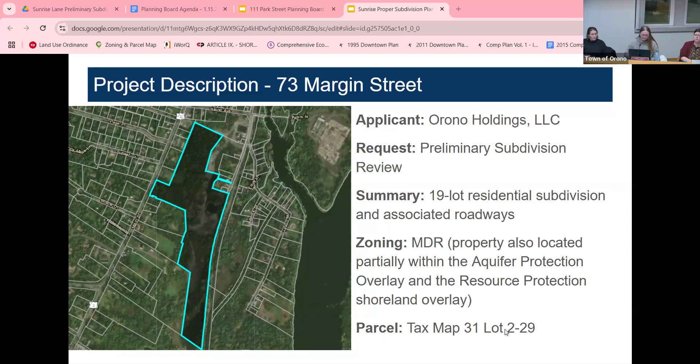So this is a zoomed in picture of the overall development area. You can see that it's really that portion of the site behind the Main Street properties. This site was formerly a gravel pit and construction area. The street you're seeing coming down from Main Street was formerly an access drive to that site. If you're driving by, you can almost see the outline of that on the site, entering there from Main Street. They're proposing to

sort of build out that roadway to our public street standards. And then they're also proposing a connection over to the private driveway, which they have an access easement over. It's the driveway you would utilize to access Orono Brewing, that access drive that they're proposing to connect to. And that was based on the planning board's comment at their conceptual plan review that you would like to see some interconnection of this proposed subdivision. You'll remember that previous iterations of the plan had shown at one point a cul-de-sac or a hammerhead there at the end.

So there are a number of issues that the board asked me to provide some clarity on or a summary of. One of those is related to buffering and screening. The board will remember that at our conceptual plan review, you had asked for a 20-foot tree clearing buffer, an undisturbed buffer rather, on lots 1 through 10. Those are the lots that directly abut the Main Street properties. That has been added to the overall site plan. You can almost see it here, there's an arrow pointing out that limits of tree clearing.

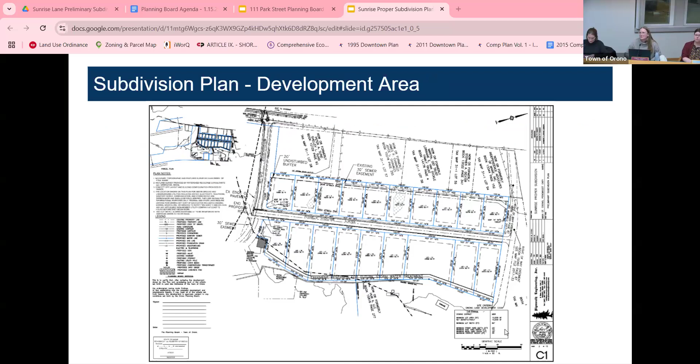In terms of trees and natural resources, no portion of the site is within a unique natural habitat determined by the Maine Natural Areas Program, or an area sensitive to archaeological or historic resources per the Maine Historic Preservation Commission. There's also no portion within significant wildlife habitat areas, such as habitat for state or federally listed endangered or threatened species, higher or moderate value waterfowl and wading bird habitats, nesting or feeding areas, critical spawning or nursery areas, or higher or moderate value deer wintering areas. That's all from available mapping from Beginning with Habitat, shared with the town.

The site is also not crossed by any known trails, based on available town GIS mapping.

The applicants have submitted, along with their application, a wetland delineation completed by Watershed Resource Consultants for the entirety of the site, including the larger portion. They found one non-significant potential vernal pool, along with 3 wetlands and 4 streams within the overall site. The wetlands area related to this development is shown on the overall subdivision plan.

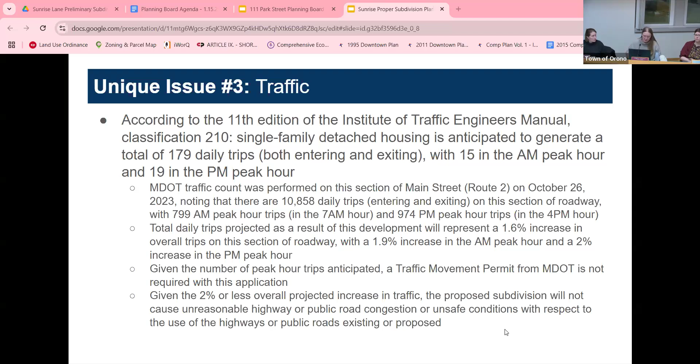With regards to roads and access, there are two minor streets proposed - using that term because that's how our ordinance describes it - called Brookside Drive and Noble House Lane. The minor streets have a variety of standards they need to meet, outlined in table 7.4 of our subdivision ordinance. This section demonstrates that those standards have been met.

The streets are arranged so that Brookside Drive ends at about a 90-degree angle with Noble House. The intention is that any future street development, not contemplated with this application but for which additional land is available, would be extended from the end of Brookside Drive, in accordance with ordinance requirements. Minor streets need to meet those requirements of table 7.4.

In this case, the proposed right-of-way is 50 feet, which is the minimum requirement. The proposed travel way is 24 feet. There's a proposed shoulder width greater than 4.5 feet, which is the minimum by the ordinance.

And then there's a 5-foot sidewalk provided along one side of both of the proposed streets, in accordance with ordinance requirements. As I mentioned at the outset, the applicant does have an access easement over the adjacent private road or access drive, which they propose to connect to Noble House Lane in order to ensure multiple access routes into and out of the proposed development.

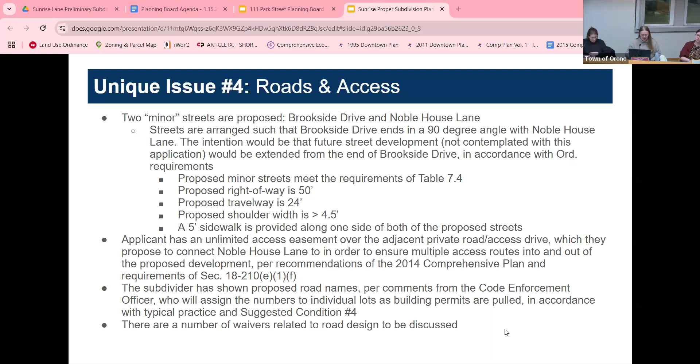There are also a number of waivers related to road design that we need to discuss, and I'll talk about that in just a minute.

So with regard to drainage and stormwater, I know the applicant's going to want to talk a little bit more about this, but the area proposed for development was a former gravel extraction site that has been allowed to revegetate. There is a paved access road that was used to access the pit that's being reconstructed as Brookside Drive. So currently stormwater flows east through on-site streams down towards the Penobscot River.

The proposed development will include 1.13 acres of impervious surface, and I think the applicant will want to clarify that there is some existing impervious surface on the site as well, which is included in that number. And there is 0.75 acres of landscaping within the proposed right-of-way.

The preliminary estimations for each lot show that upon full build-out, the subdivision will end up resulting in a total of 2.43 acres of impervious surface, driveways, homes, and garages, and 6.24 acres of total developed area, so lawns and other maintained vegetation. So post-development, the existing Main Street house lots, as well as the portion of the proposed development area, including Noble House Lane, will sort of drain towards the proposed wet pond.

That's located near the end of Brookside Drive. If you're looking at the overall subdivision plan, you'll see that there. The wet pond has been sized to meet current Maine DEP standards, including Chapter 500 and SLODA requirements for the road and the lots within the proposed subdivision. And the wet pond has been placed to utilize that natural grading pattern of the site.

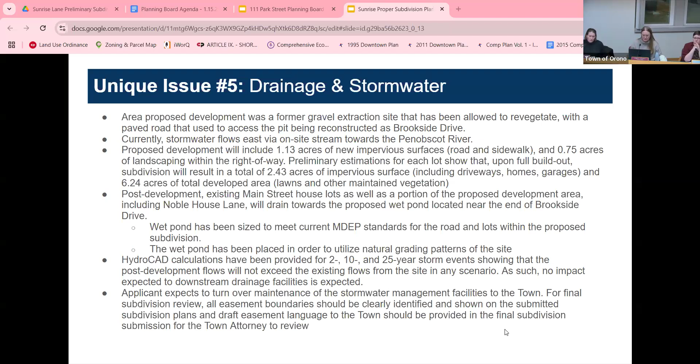And the applicant does expect to turn over maintenance of the stormwater management facilities to the town. So I do just want to note that for final subdivision review, we're going to need any easement boundaries that would be expected for the town to be maintaining to be shown on the final subdivision plans, and will need draft easement language sent to the town so that the town attorney can review that.

In terms of utilities, the proposal intends to utilize municipal hauling of trash and recycling. I reached out to Public Works. There's no known capacity constraints with our contractor, so the proposed subdivision will not cause an unreasonable burden on the municipality's ability to dispose of solid waste, which is the ordinance standard here.

The proposal intends to connect to the public water system through an 8-inch water main through the existing 16-inch main available within Main Street. And a preliminary capacity to serve email has been provided by the Orono-Veazie Water District back in February, and that's included in the meeting packet.

And then I do want to note that they are proposing to connect into public sewer as well. So the town's WPCF has the capacity to serve the proposed development. They have noted some concern with the condition of the clay line within Margin Street.

So we've come to an agreement with the applicants that they will be responsible for paying an impact fee, which will be in the amount of the replacement of one of the manholes specifically serving this site. That should be sufficient to prorate the applicant's portion of the impact to the sewer line, per conversations with WPCF. The town will either utilize that fee or have the applicant pay for and upgrade it at their own expense. We haven't worked out those details yet, but we'll be taking an amount sufficient to prorate the cost of their impact.

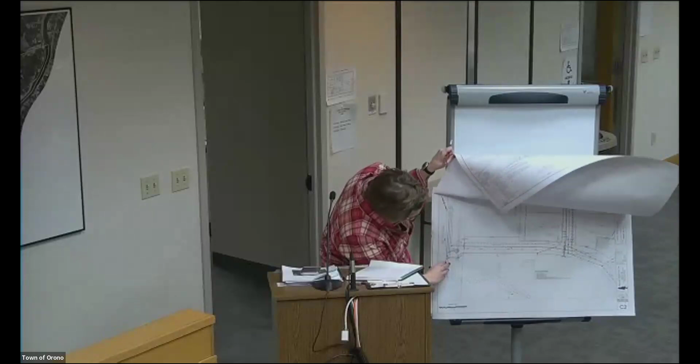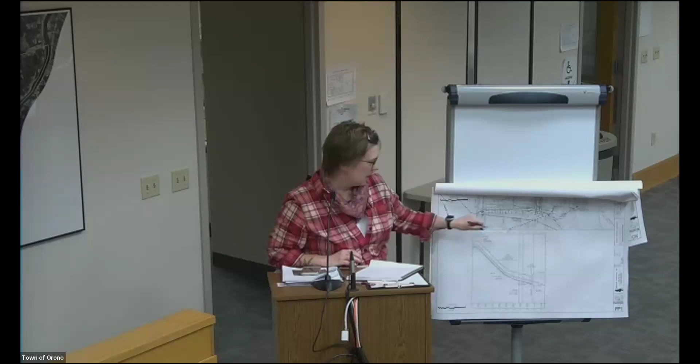PP1 is the plan profile of Brookside. So you can see here, even with the sidewalk put on this side, you've only got grading out maybe another 5 or 6 feet over here. But if you put the sidewalk on this side, it's going to drag everything down, and you're going to have to put more ditching on the lower side.

I didn't do any of the grading on this - that was something Scott had done. I know they bounced the idea back and forth, but that seemed to be the better of the two choices. So with the sidewalk, it's a tight site.

You're looking at the stream protection zone, which you've got identified on the plan. I'm just looking at the sidewalk - anything you can do, and we talked about this the last time you were here - protecting Johnny Mac Brook to the extent possible. But I just want to make sure that the toe of slope isn't pushing against that stream protection zone from the sidewalk.

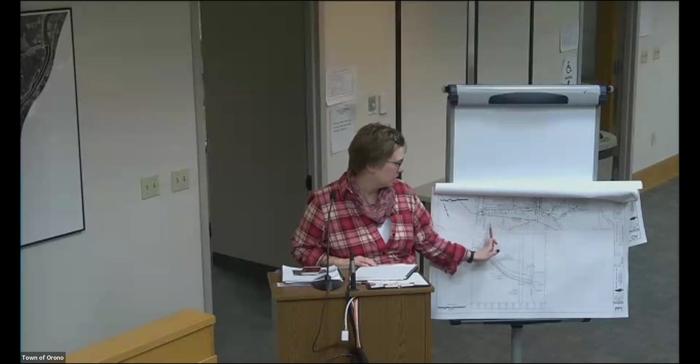I haven't seen the grading along that section of road, but it's pretty tight up toward Route 2 - right here, I think is the only place it gets real tight, just this portion, and it doesn't cross the stream protection zone. After that the stream gets further away, so the stream protection zone gets further away too. It gets close, but it doesn't cross into it.

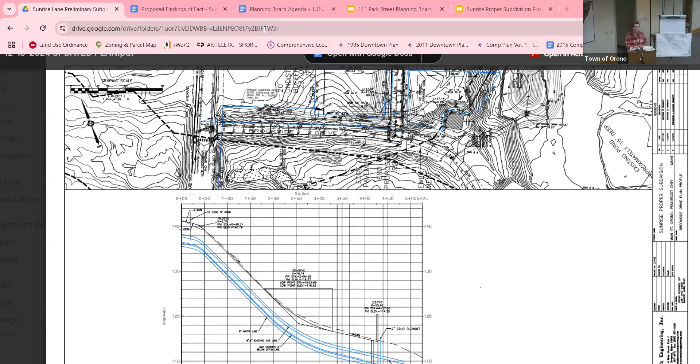Last time we talked about connectivity, which I was pleased to see you show a connection to the road down to Orono Brewing. Has that been finalized? I see you've got the road going right to the property limit at the end of Noble House Lane. Have you secured that access? That was actually already existing in their deed, before we even came the first time. Good.

Anybody else want to jump in? I've got a few more. Mine was around the road - I guess to go to 8%, you have to bring a bunch of fill in, right? Which would enter into the grading, with Johnny Mac Brook, so.

All right, I have some concerns about the gully, station 350 on Noble House Lane, that you propose to fill with 18-inch riprap. So, yeah, the plan is - I was trying to figure out the best word to call it, and I guess gully is the best word for that. It looks like a gully on the topo.

It pretty much is, yeah. So the reason for it - if you actually look, now all my plans are gonna fall, I can guarantee it, just because of the way I put them off. So the orange right here is actually the culvert that comes across Route 2, and that's the sole reason that gully is there, is because it has eroded down across that parcel.

We obviously can't take that culvert out. That culvert's Route 2, whether it's the town or whether it's DOT. And I mean, you can definitely see it just troughed right down through. So our proposal being to put that rock drain there.

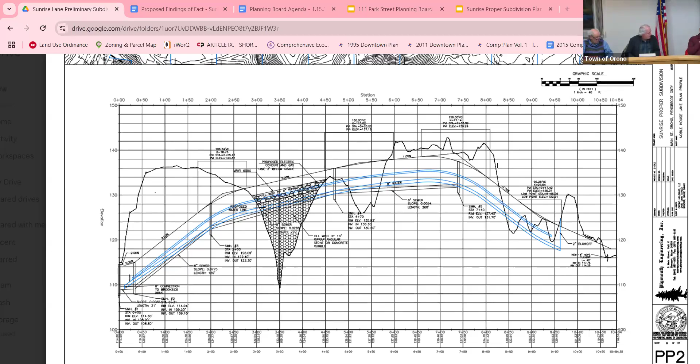The other culvert you're talking about—is that like the culvert they built on the Orono-Veazie town line off Route 2? The new industrial type concrete culverts? Going across Route 2? Yeah, with that redevelopment maybe? I don't think they have any idea. I don't know if they're that—because that was a flow problem down there, that's why they put the new concrete culvert in. Yeah, because they're oversizing culverts—oversizing all replacement culverts, open bottom a lot of times, natural substrate, all that. I can't imagine they do that. They closed that road for like two months. I don't think it closed Route 2 for two months.

I'm going to side with our town engineer on this one, and ask that an alternative be presented. Do people agree with that? I do. Yeah, okay. Well, I think there needs to be something that's clear before this project can go forward—this has got to be fixed. Okay, all right.

Thoughts on the sidewalk? Our engineer mentioned moving it to the other side. I think the explanation we heard makes sense—if they can minimize grading and not interfere with the stream protection zone, and the sidewalks on that side of the road, I don't necessarily have any issue with that at the moment. Others, what do you think? Is that okay? Yep.

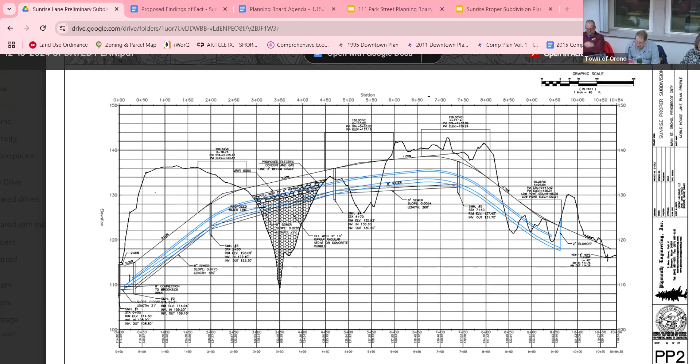Can you talk about the stormwater treatment? I don't know how wide it is at the bottom of the hill. Can you talk about that reserve for stormwater treatment and what your intent is with that? Hold on.

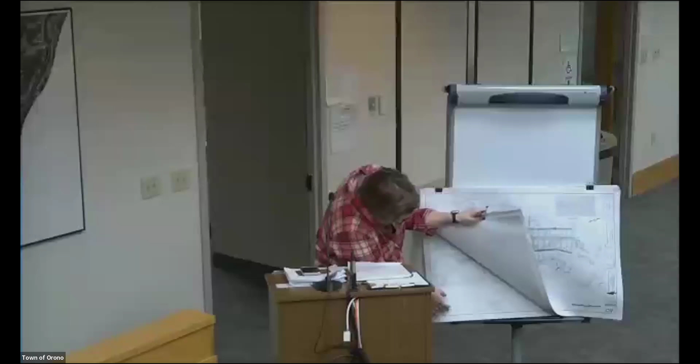Yeah, well, that's one on the floor.

So this is our D2 street drain, post-development drainage. What we're showing is that this area, these bottom lots, aren't being treated right now by the pond, but the pond is sized to treat them in the future.

I could still meet the numbers with the HydroCAD without treating those, because all the water goes cross-country long before it gets anywhere. So we're not showing the ditch right now, but it's being shown on the deeds that it's going to be reserved for future ditching to get the lots to the pond. Right now we're actually treating stormwater coming off these lots even though there's no treatment going on, because it's all flowing in that direction. So even though the pond is sized to meet all our development, we're treating stuff that's not part of our development. Right now we're not treating these, but if and when there's future development, that's being set aside so we can.

One of the things - what's the rationale for not putting in a ditch now? Just the amount of earth moving. I think he's really just trying to limit his work to doing the road at the moment.

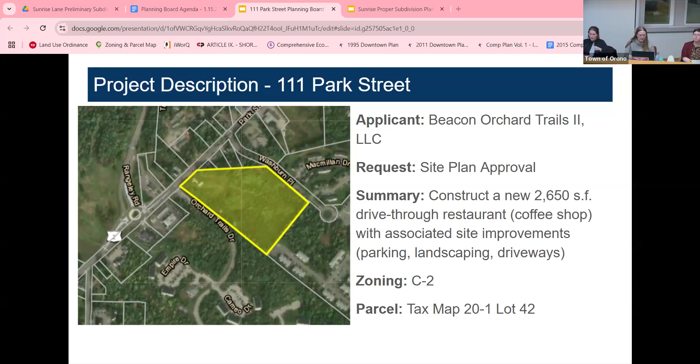The aerial view shows the entirety of the site that's highlighted. They are proposing only a limited area, which I can show on the site plan here. The proposed building is in the vicinity of the existing house on the parcel, and they're proposing to divide the parcel at this point for this new development, and also construct an emergency access drive through the rear of the parcel. They're proposing two-way access from Orchard Trails Drive, which I want to note is a private road, but it is owned by these same applicants.

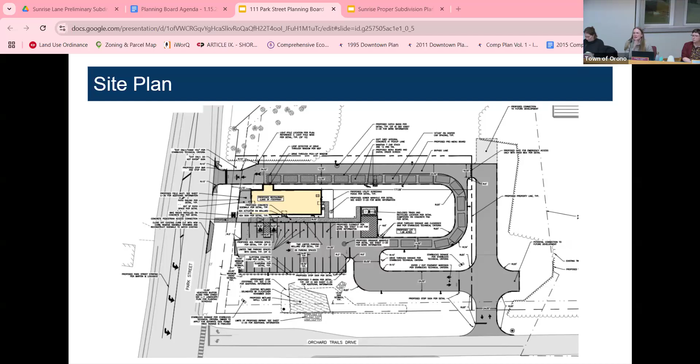So they're proposing two-way access there, and then one-way access out onto Park Street. We'll talk a little bit more about traffic and access in just a second.

With regards to the unique issues the planning board wants me to talk about, section 18-126-1C requires a 10-foot buffer strip between new parking areas and Route 2. This is our design guideline for this section of Route 2.

This section also requires one shade tree at least 5 feet tall and 1-inch caliper to be planted no nearer than 5 feet to any lot line for each 300 square feet of required landscaped area, and at least one deciduous shrub or evergreen at least 18 inches to be planted for each 200 square feet of finished landscape area. The applicant is proposing 3 swamp white oak trees at 2-inch caliper and a minimum of 6 feet when planted.

3 Armstrong red maple trees, again 2-inch caliper, minimum of 6 feet, plus a variety of shrubs and underplantings. While not specifically required by our design guidelines for this section of Route 2, there are additional plantings proposed within the landscape areas just outside the required buffer area. I didn't include those in the total, but they are shown on the landscape plan submitted.

With regards to trees and natural resources, wetlands and potential vernal pools have been identified on the entirety of the 10.59 acre site by Flycatcher. That report is included in the meeting packet and dated November 14th. There were no streams identified on the overall project parcel. There are 2 potential vernal pools and 6 wetland areas identified, the majority located at the rear of the overall site, closest to the apartments at Washburn Place.

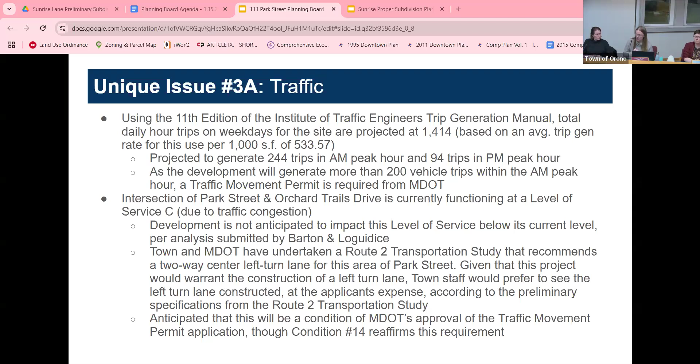Because it would be needed to enable this development at the applicant's expense, we have provided the applicant's representatives with the preliminary specs from the Route 2 transportation study so it can be designed according to those specifications. We anticipate this will be a condition of any approval from Maine DOT of the traffic movement permit, but we have also suggested a condition at the local level as well, if that would be favorable.

With regard to access, there is currently one curb cut from Route 2 serving the existing house lot. The proposed vehicle access to the site will be from a two-way 24-foot access drive from Orchard Trails Drive, which is a private road owned by the applicant. They're also proposing a one-way access drive from the site onto Route 2 that will be utilized as an exit from the drive-through.

We have minimum sight distance requirements of 250 feet for roads where the speed limit is posted at 30 miles an hour. So the sight distance from the Park Street curb cut exceeds 500 feet looking left and 400 feet looking right, based on the analysis submitted by the applicants.

And the exit onto Orchard Trails Drive, which is an unposted private road where the speed limit is assumed to be 25 miles an hour, a sight distance of more than 300 feet was recorded looking left. Looking right from the exit, the intersection with Park Street is very clearly visible.

The proposed two-way 24-foot access from Orchard Trails is really intended to be a connection point to future development. I do want to note that's not contemplated with this application. They're showing the roadway ending in a hammerhead there with a gate for emergency access.

After review of both the 2014 comprehensive plan policy and the 2018 Park Street transportation study, staff is recommending a condition that any future development would provide or extend that connection point to Washburn Place in an effort to alleviate traffic congestion on Park Street.

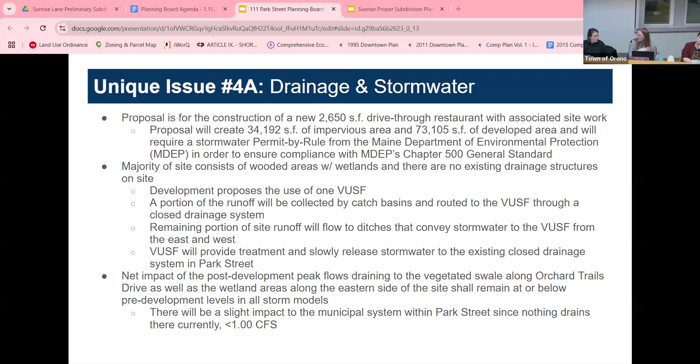There will be a slight impact to the municipal system within Park Street since nothing drains there currently, but we've suggested some conditions related to some requirements for the MS4 permit for the community.

An erosion control plan was submitted. This was reviewed by Megan Hess and was found to be appropriate. The erosion control measures that will be implemented include temporary erosion control measures during construction.

So a crushed stone stabilized entrance, the placement of silt fences or erosion control berms where necessary, the installation of stone check dams where necessary, mulching and seeding, slope stabilization, and the sweeping of adjacent roadways of tracked soil when necessary. So we're not tracking soil out onto the roadways.

Post-construction, the disturbed areas not subject to other proposed conditions will be loamed and seeded.

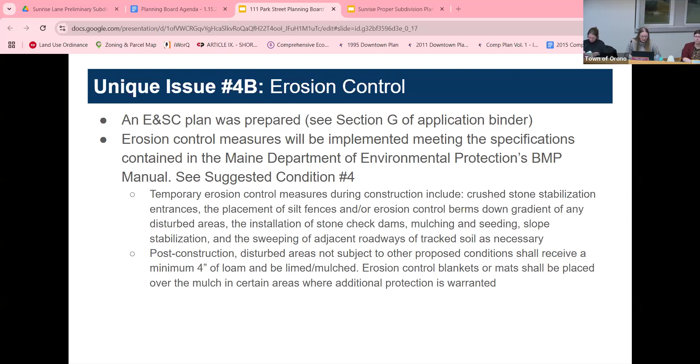So with regard to lighting and signage, the proposal does include new pole-mounted site lighting in the parking lot. Building-mounted site lighting is also proposed along with bollards. They have provided lighting cut sheets, which are included in the packet, showing that all proposed light fixtures rated at

more than 1,800 lumens, which is the cutoff point of our ordinance, or the review point for our ordinance rather, are downcast so that no direct light is emitted above the light source. Again, that's an ordinance requirement.

The proposed main entrance to the building faces Park Street and has an intersecting or overlaid hipped roof with signage and a canopy over the doorway in order for the entrance to be clearly identified. I'm calling that out specifically because that is an ordinance requirement for this section of Park Street with their design standards.

And then there's a secondary entrance to the building, which is located to the side facing the parking areas, which has another shorter intersecting hipped roof with a canopy and signage.

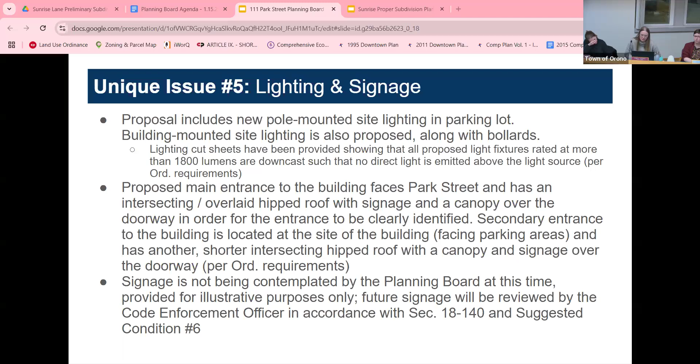I do want to note that signage is not being contemplated by the planning board. They have provided signage for illustrative purposes only, and that will be reviewed by the code enforcement officer in accordance with section 18-140.

With regard to utilities, during construction, the contractor will be responsible for the disposal of waste, and post-construction, they are showing a dumpster pad and fenced-in area on the submitted plans. A private waste management company will be contracted for trash and recycling pickups, so no impact to municipal services there.

The Orono Water Pollution Control Facility provides sanitary sewer service from an existing 8-inch sewer main that runs along the eastern side of Park Street. The applicants are proposing to connect to that. WPCF has indicated that they have adequate capacity to handle this project's waste generation, and the capacity to serve email was included in your meeting packet.

Likewise, the Orono-Veazie Water District provides water service on Park Street on the same side as the proposed development, and they have also provided a capacity to serve email that has been included in your meeting packet. The proposed development will provide electrical, telephone, telecommunication service, and natural gas. Those are adequate to meet the anticipated use of the project and will be undergrounded consistent with section 18177L.

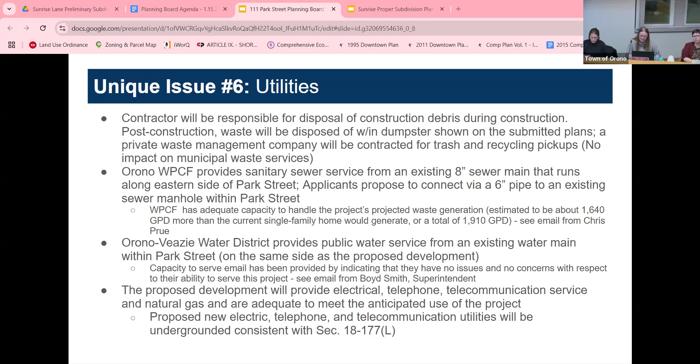With regard to waivers, there are none requested. A number of items have been determined to be not applicable based on the proposal though, which are detailed in the applicant's cover letter and the attached checklist, and staff is in agreement with these items.

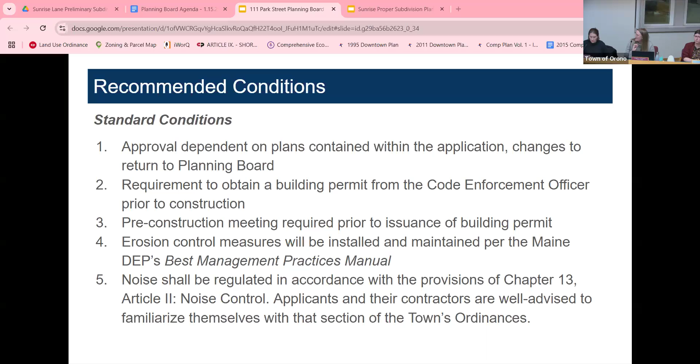And then in terms of conditions, I almost went through these earlier, so I won't spend too much time on them, but we have our standard conditions. Our additional conditions would be that the signage is reviewed by the code enforcement officer. There's a requirement in our ordinance that the required landscaped buffer areas are maintained in good condition by the owner.

And going further than that, the section requires that vegetation that dies within the required buffer area is replaced quickly, but at least within one growing season, with replacements that conform to the original intent of landscape design. They are required to provide an application for the proposed curb cut.

I would like to leave that condition in, but I would like to verify it because it is already an existing curb cut. So leave it in for now, but I will verify.

The stormwater as-built drawings are submitted to the code enforcement officer. That's in accordance with chapter 13. Again, that's related to the community's MS4 permit requirements. A stormwater maintenance agreement is to be filed on the registry of deeds.

That condition on future development providing or extending the roadway connection to Washburn Drive. I do want to note that if that connection is developed in accordance with town standards for public roads, they would be eligible to petition the town council to take over maintenance of that roadway. So potentially an incentive there.

Our town engineer had requested that the plan set was revised to revise a manhole. That has now been added to the plan set that was included in your meeting packet. The proposed left turn lane will be constructed at the applicant's expense according to preliminary specifications. I think I mentioned the wrong engineering firm in your findings. It is Sebago Technics that did our Route 2 study. So clarifying that there. That's all for me.

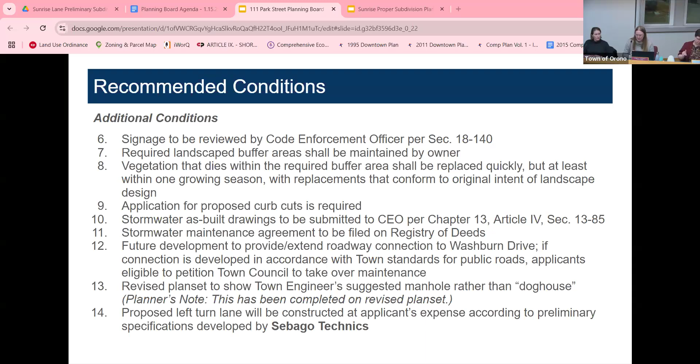The applicant's representative is here, and some of the applicants are online as well if you have questions.

Mike Triglione here with Acorn Engineering, project civil engineer. Ryan Senator is the project architect. He's on the call, as well as the developers, Ali and Adam from North Beacon. Not sure if I have much to add after Isabel's presentation, but I think we can just open up to any questions the board might have.

Again, before I open up the public hearing, limit questions from the board. Somebody want to fire away? I've got a question about traffic. Looking at the traffic permit application, as a drive-through, will traffic back up onto Park Street?

The layout of the site was really driven by maximizing the queue length on the developed portion of the parcel. So I think we have a 14 car stack there, which is pretty healthy. And then it's gonna stack up, but it's definitely not gonna stack up all the way to Park Street since it has to go through Orchard Trails Drive.

I believe the traffic movement permit takes this into consideration and looks at it. Do you have a site plan that shows that stack? Yeah, you can pull up Isabel, the C10. Access coming off of Orchard Trails Drive. So, I mean, that would be a really long stack. Yeah, so you can see over there, that's why I'm thinking.

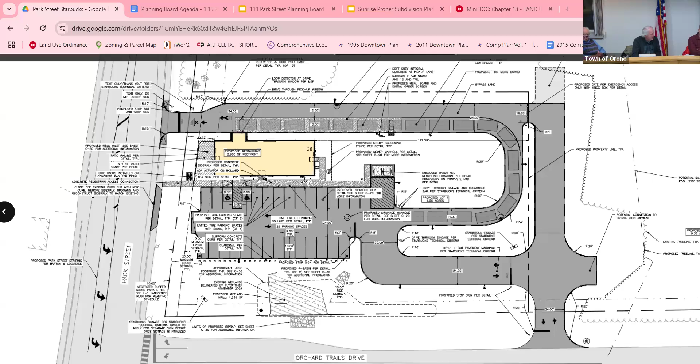Maybe the traffic won't be, I don't know, every coffee shop has their favorite customers. There's Aroma Joe's and Dunkin' Donuts and then Starbucks. So will it be a combination of all those customers, or do you think you generate an entire new base of customers? I know Starbucks does well on campus in the student union. It's, I don't know, there's no shortage of coffee drinkers, because there's just so many people here. Where would the additional traffic come from? It has to come from the other two competitors, probably. Yeah, people coming from out of town to go to Starbucks, come off the interstate.

Other questions before I open it up? I don't have a question, but I have a comment. I don't see why we need a Starbucks.

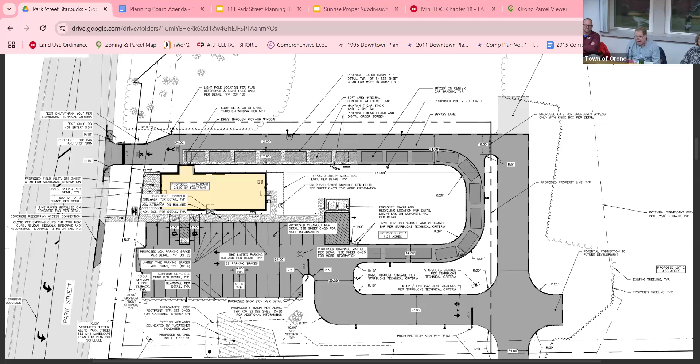Yep, over there. So if you could address that, because one of the things that's fairly common, I think, with the Dunkin' Donuts on Stillwater Ave ages ago, we requested screening, buffering, so this is a noise issue. We're pretty consistent about trying to protect neighboring residences about that. So could you address that, and how you might be able to muffle that so that the neighbors don't have to be impacted?

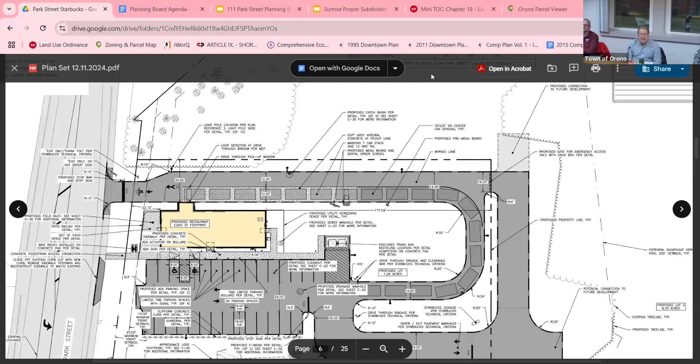I guess I would kind of point to the fact that there's definitely an existing pretty dense tree line to the north, which would probably be the nearest affected abutter there would be the one to the north, and then the menu board is pretty far internal to the site there. So that's where the noise would be coming from. I would say that you're definitely gonna get natural buffering with that vegetated area right there.

So you can 100% guarantee we won't hear that at our house?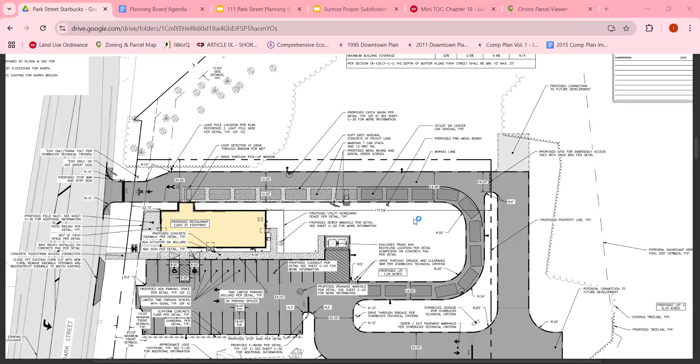That was one of my concerns. The other concern is, of course, the heavy traffic. If anyone there lives on Park Street, getting out of your driveway is very hazardous at certain times of the day.

Particularly where our house is, because we also get traffic from Washburn Place, mainly making lefts to get to school. So when they see a break in the southbound Park Street traffic, they try to quickly make their lefts while we're trying to make a right out, using that same break in traffic to turn.

I've noticed, especially at our house, and also the neighbor right across from us, there's been times where I've seen almost collisions there because there's just so much traffic.

This happens a few points during the day, but it's worse in the morning and worse in the evening. I'm not sure if a left turn lane in the southbound Route 2 Park Street would help eliminate any problems.

It could possibly cause a backup if there's too much traffic in that left turn lane, and then the southbound would be backed up. It's already treacherous trying to make a left. Sometimes we have to make a right if we can, go down to the circle and all the way around just so we can go north on 2. So we are a little concerned about additional traffic being in the area.

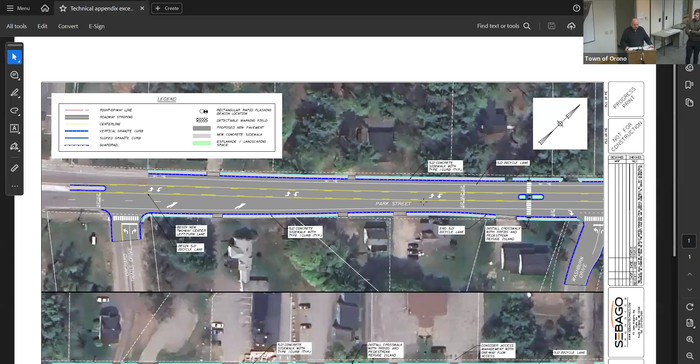All right, further comments from the public? Last call. Anybody online? I have nobody with their hands raised online. All right, it's a public hearing.

Last comments, further discussion. I think we've addressed concerns. The noise issue we heard was the primary complaint, and that seems to be addressed at a later date. There are ongoing issues and considerations for pedestrian safety, and ongoing studies hopefully will improve pedestrian and vehicular traffic patterns - to be determined.

Any other? All right, I think we have no waivers. That's good. Yeah, geez, I think we're ready for a motion.

Who wants it? I'll do it if you want. You want to do it? Mike, you ready? Looking for it. I can, there we go.

I move to approve the site plan application of Beacon Orchard Trails Limited Liability Corporation, authorized agent Acorn Engineering Incorporated, revised through January 3rd of 2025, to construct a new 2,650 square foot drive-through restaurant with associated site improvements, which include parking, landscaping, and driveways at 111 Park Street, which is at tax map 20-1 lot 42, per the findings of fact and conditions of approval dated January 15th of 2025.